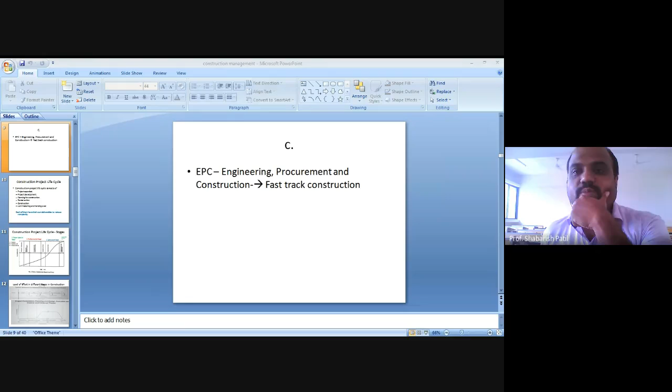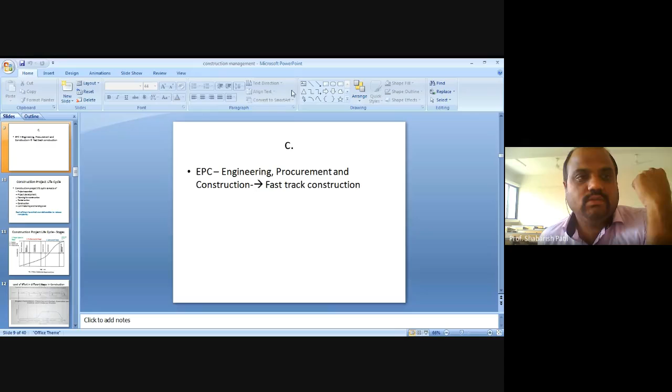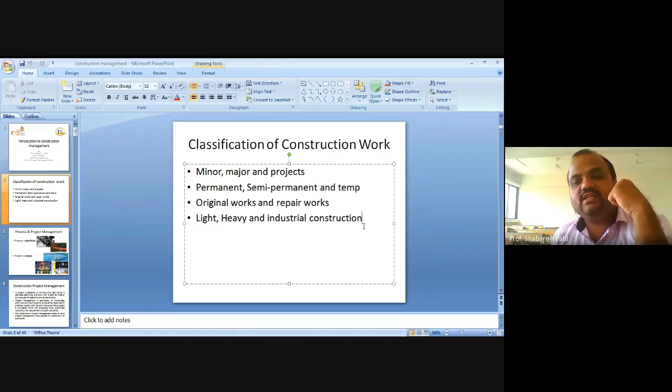So last class we were discussing, just recall those slides again. The classification of construction work based on the amount involved in it, based on the lifespan of that particular project, based on whether we are doing a new work or repair work, and based on where it is being applied: light, heavy, and industrial. As far as light is considered, residential buildings, commercial buildings, institutes are all light structures. Heavy structures are like your infrastructure projects, and then industrial construction is something related to industries. At the same time, we discussed what is process and project management.

The line between process and project is very blurry. I cannot distinguish what is process and what is project because there's an advancement in technology where most of the things are becoming process, but still we may have to call it a project. Just to make you understand, manufacturing cars or processed food is a process, whereas construction of a building, bridges, research and development, and the space or astronomical area are all called projects. A project is very unique, having a starting and end point, and it consumes resources out of which we get an outcome. That's called a project.

If we apply the knowledge of project management in construction, that becomes construction management. In most cases, we have to understand what project management is and how we have to apply it. Not just the knowledge and the skills, but the tools and techniques involved in project management. If we apply them to construction work, that becomes construction management. But still, just recall that management is always an art. Management is a science, it's an art, and it's a profession.

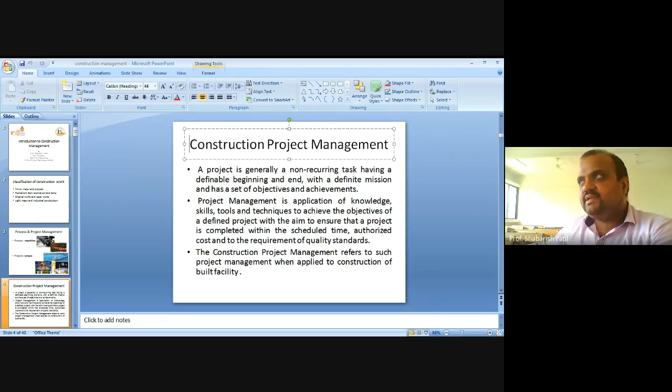Let me give you an example. You may be a good driver, you have good driving skills and all those things. If the one coming opposite to you makes a mistake, still we come across an accident. Management is the same way. How we are handling it, who is in front of us, whom we are handling, it all depends on that also. So there is always, I should not say this, a bit of luck, or some charismatic approach by a person where he can handle the situation. Those things also matter in management. But here we will be dealing with only direct managerial approaches.

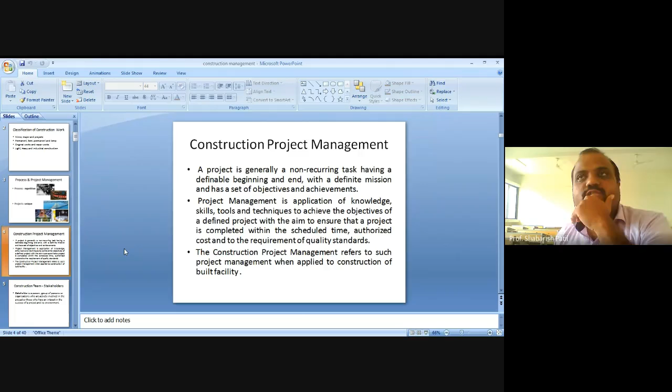Then we discussed who the stakeholders involved in construction are. There are many stakeholders like the owner, engineer, architect, contractor, subcontractor, the government, the financier, local authorities. It varies from project to project. The stakeholders for a residential building will be different from those for infrastructural projects. When it comes to public works like highways, dams, canals, stakeholders will be too many. You have to take accountability of each individual. Then we should look at the execution of the project. Before we start the project, we should take the consent of the stakeholders. That is one thing.

Basically most of the organizations, as far as construction is concerned, make a record called a stakeholders register. That's necessary. Once you visit any construction industry, you ask for a stakeholders register. I'm not asking you about local construction agencies. If you happen to visit L&T, Gammon India, ITD Cementation, Shapoorji Pallonji, such companies basically deal with infrastructure.

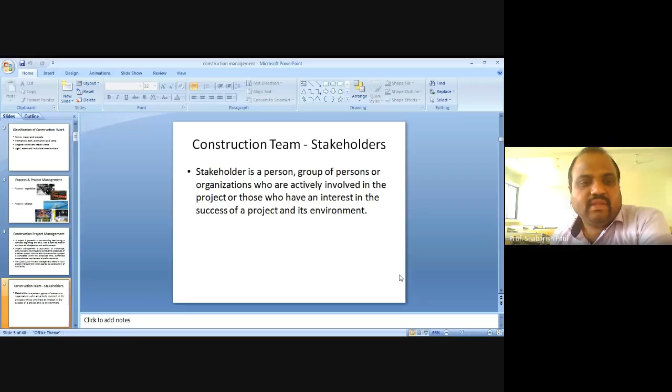They always keep a stakeholders register so that the concern of every individual is taken into account, and then the decision about the project execution is made. That's also a government responsibility. So this is a construction team or the stakeholders involved. Just a broad view: you have a contractor, an architect, engineers, subcontractors, consultants, owners, and then we have financiers, government agencies, and public agencies.

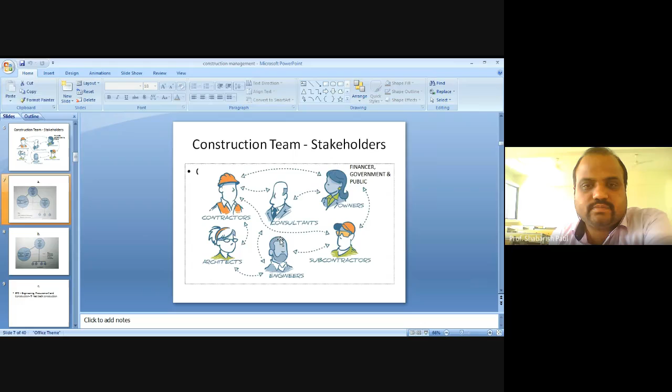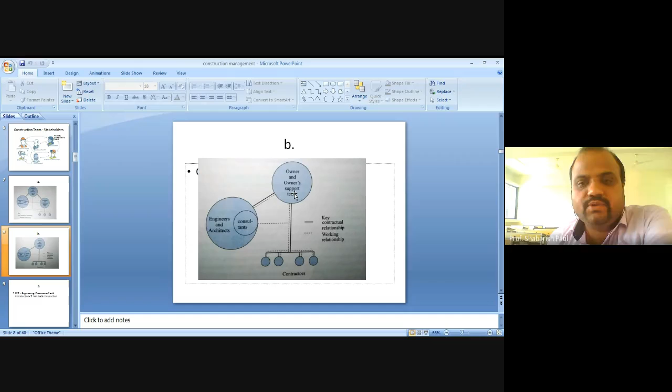The second one is this type of relation where the owner directly has a working relationship with the contractors and with the engineers. Here this generally becomes some sort of government project. The government will be the owner, and governments will have their own engineers and architects, and at the same time the government will allocate the work to the contractors. This is basically how most government works happen, like PWD, CPWD, etc. It's of this sort.

The third is what I call EPC, engineering, procurement, and construction, a type of relation where everything is allocated to one agency. Most of the good construction companies take projects under this model. Engineering, procurement, starting from scratch to the completion of the work, everything is done by this single company. He may go for subcontractors, but that is not an issue. In the working relationship only two parties are involved: the owner, and the one who deals with all engineering, procurement, and construction.

So there is good communication when we allocate the work in such a contractual relationship. There's always a good relationship with the owner because there are no other parties involved. When there are only two people, communication will be better, so no communication gaps. I think in that case this works as a better model. At the same time, within the company, there will again be better communication.

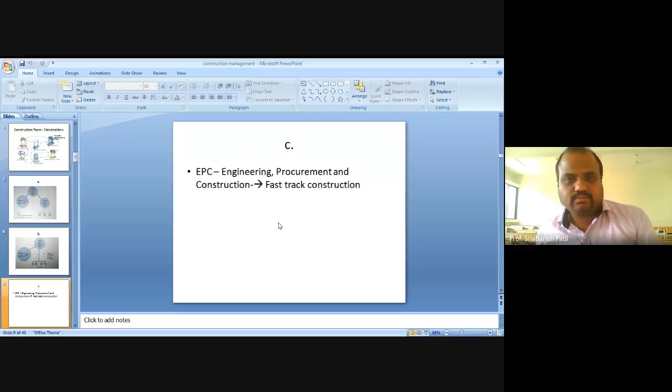Next, what does the construction project life cycle involve? We have to understand what works are involved, also called the stages of the construction project. The construction project life cycle consists of project appraisal, project development, planning for the construction, tender action, then the construction, then commissioning, and then handing over. This is one broad classification of a project life cycle.

Project appraisal is the initial stage. We should take an approval from the government to construct this project. That's how the PWD or the CPWD works. They seek permission from the government. Once they approve it, then comes project development.

Okay, in a project appraisal, it is only in imagination. It will generally be some sort of basic thing in a project appraisal, maybe some sort of imagination model or some sort of virtual model. When it comes to project development, they think of writing down or making reports for everything. They plan it. Basically, they may use tools like software to plan it.

Once that is also approved, then we go for the third one, that is planning for construction. Once the first two phases are over, the third one is planning for construction. We have to plan it for construction. How many engineers are required? What type of engineers are required? What machines do we require? What type of human resource is required?

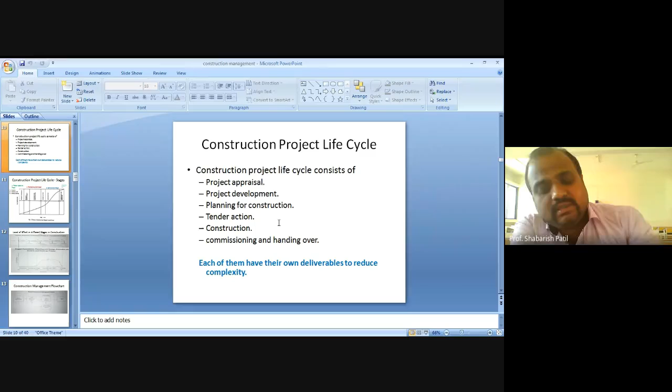Once the tendering process is over, a suitable party is selected. In most cases, selection of a party is based on the amount, the rate they quote. So the lowest bidder will be given the chance for execution, that is construction. Once construction is completed, they have to hand over the project to the owner, maybe the government. So commissioning is starting the project and handing over the project to the owner.

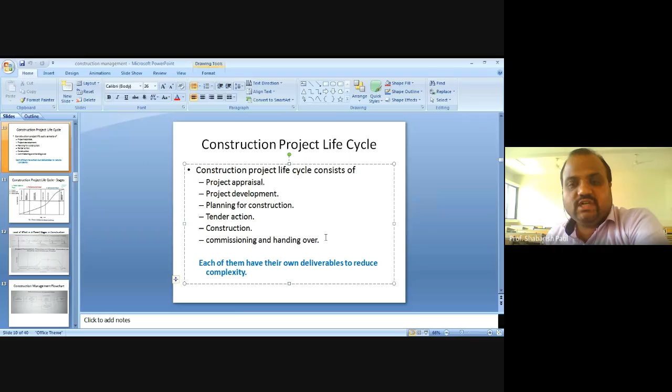One thing to understand here is each of them has its own deliverables to reduce the complexity. This life cycle, the six I have mentioned, is as per the IS code. If you refer to other textbooks, you may get different answers. This is a broad classification of a project life cycle. Each stage has its own individual complexity. If I want to reduce my complexity, I may have to increase the number of stages. The fewer the stages, the more the complexity. And again, it all comes with experience. How to judge, what to judge, it always comes with experience.

I have tried to show the same thing to you in the form of a graph here, a typical project life cycle. Along the x-axis is time, and along the y-axis I have shown the percentage of completion. These are the different stages of the construction project. The first one is the project appraisal stage. What is involved in project appraisal is inception, feasibility, and strategic planning. These are the main concerns during project appraisal.

And as far as infrastructure mega projects are considered, this is generally done by the government. In the inception, feasibility studies are taken. Feasibility is like whether the project is going to be profitable or not; one example, that is economical feasibility. There is another thing called environmental feasibility, sociological feasibility. There are many feasibility studies we may have to do.

Okay, so all such feasibilities are done. Then once everything is satisfied, they go for the strategic planning of that particular project. So this is the first stage, project appraisal. Once I complete this first stage, only around 1 to 2% of the work is completed here.

Then next comes the pre-construction stage. Anything done before the construction, that is the pre-construction stage. What is involved in the pre-construction stage is project development. We go with the project development process, we plan for the construction, then we go for the tender action.

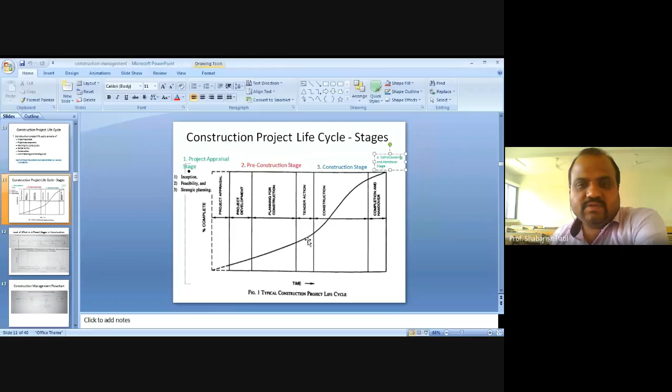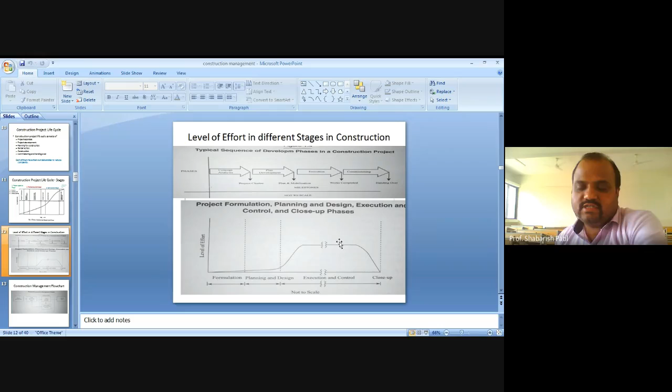When it comes to execution, look at this. As far as execution is considered, you require 100% effort. As the project is going to complete, your level of effort required again becomes less. When you come to close-up of the project, your level of effort will be zero. So this is how your effort as a construction manager is going to vary: in formulation it's very less, in planning and design a bit more, but it's huge in execution, and at the end of the project it's again reduced.

And construction management is required from the starting phase to the end phase. It's required everywhere. So if you want to be a construction manager, you should know everything. You should have a knowledge of design, quality, safety, and the design and drawings of the construction. You should understand how laborers are working, you should understand how site engineers are working. The role of the construction manager is very, very huge.

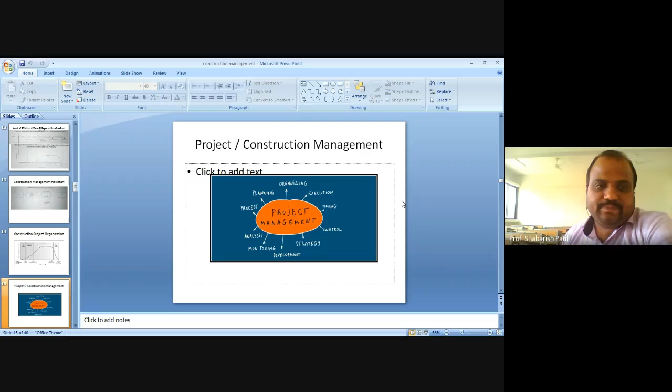Next, I want you people to make a list of activities which may exist in a construction project. I'll give you 2 minutes. Please make a list of activities which are involved in the construction phase, construction work. And meanwhile, please give your attendance in the chat box.

Imagine yourself in the shoes of a construction manager or a site engineer. Then think of what activities you may have to do being a construction manager.

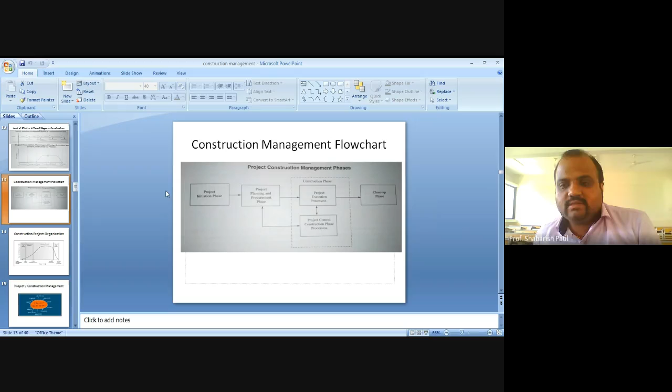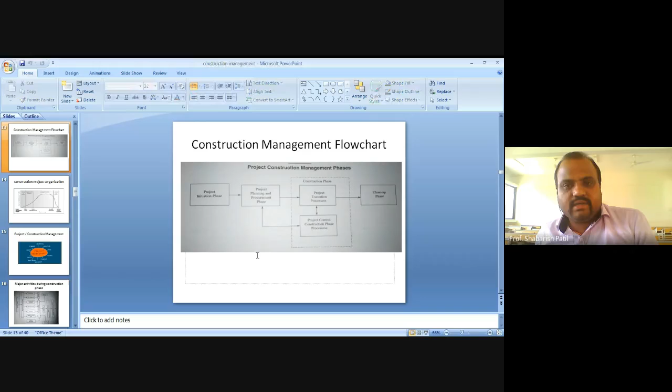Good. See, I require participation from your side also, otherwise it becomes very difficult for me to handle the class for 45 minutes. Just a single person barking on one side, that becomes very difficult.

Okay, the same major activities during the construction phase, I have made a list. See if you have missed something. Now look at this pictorial way of the activities done by the construction manager in the construction phase. He is involved in signing of the contract. The construction manager's role is there in tendering and giving the contracts. At the beginning of the construction phase, he has to mobilize the resources. He has to approve the staff.

The mobilization of the resources is bringing all the required construction materials. Say equipments are required, we have to bring those equipments. It's called procurement. Procure the required people of the required designation. If we require a construction manager, it should not so happen that I bring an electrical engineer to the field. So I should bring the resources through a proper channel with the proper specialization.

Then construction scheduling. We have to schedule our work, when to start, where to end. If you take an example of construction of your own building, the first work is the line out or the setting out work. Once I give a line out, then comes the foundation.

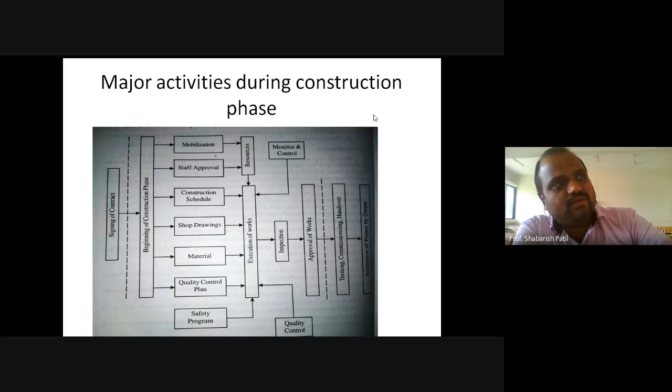Then materials. I have to handle the materials very carefully. I should give orders to the vendors, the vendors send the materials to my site, and I'm supposed to make sure that I'm getting the materials at the lowest cost. That's material management. Whatever I have written in the boxes here, you can name them as mobilization management, staff approval management, which is basically human resource management, construction scheduling management, done by the planning engineer. All these can be ended with the name management. They have their own different identity on the field and do their own work. Material management, quality control plan.

A quality engineer is always required to have quality control and to assure quality assurance and quality control. Then safety, it's called safety management. With all these things, we execute the work using resources. And we have to monitor and control our work, the execution of the work, because we need to make sure that our work is going as per the plan. Inspect it as and when required.

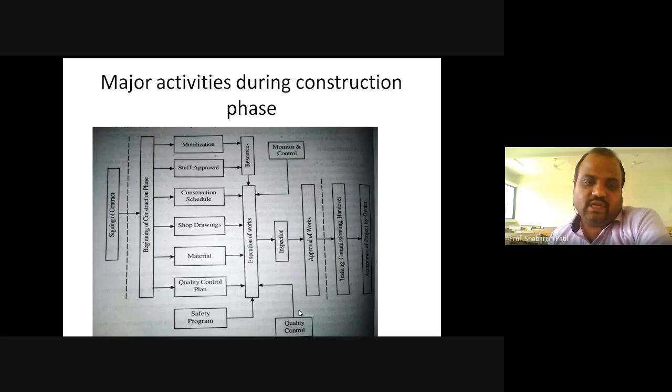If this is being done, then the government is going to check your work, and he is going to approve your work. After this, again, we may have to go for testing, commissioning, and handing over of the project, and then it's an acceptance by the project or by the owner. So these are the activities broadly involved by a construction manager on the construction site. I hope you got a rough idea about what a construction manager may have to do on the field.

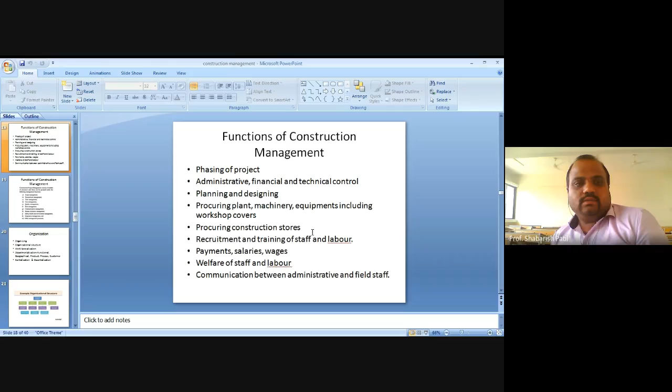Next, what makes these construction projects very unique? See, construction projects are very unique. Unlike a textile industry or any manufacturing industry of PPE kits, which are very different, they are very process-based. But the construction industry is very unique. Why? Because it's a one-time activity. Owner, engineer, and contractor are going to be different for each one-time activity. The complexity involved is very high here.

It's a multidisciplinary complexity. If you take an example of oil refinery work, you cannot make a list of engineers involved there. We require a civil engineer, mechanical engineer, automotive engineer, robotic engineer, chemical engineer, biotech engineer. We require so many engineers in the refineries. Construction of refineries is again done by a civil engineer. It's one of the construction projects. Electrical engineers we require. In projects we require very different types of engineers, different types of labor. So it's too complex. It makes it multidisciplinary.

Another thing is high cost and time for execution. Money has a time value, and the cost involved is also very high. I think I showed you in the last class that almost around 9% of GDP is being covered through construction. So the amount involved is huge here. Difficulty in achieving quality standards: it becomes very difficult to achieve the quality standards in some cases. Risk of failure is very high. Uniqueness of the people involved, so handling them is again very difficult. Feedback mechanism is not so easy.

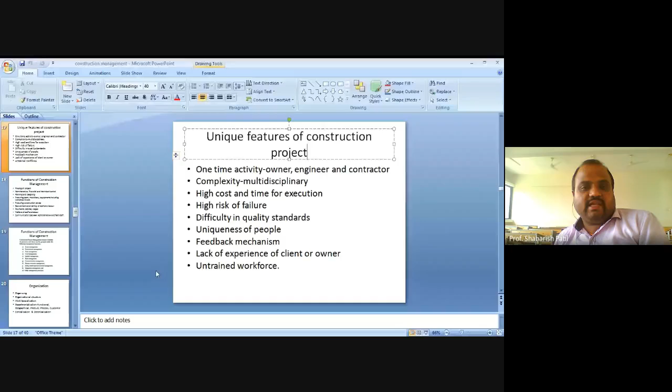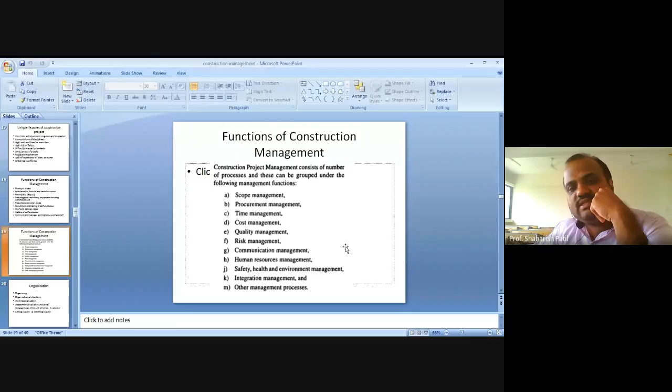In the next class, we'll deal with this. I think I will end with this slide. Please go through this slide. I'll start with organization in the next class. These are the functions of construction management: scope management, procurement management, time management, cost management, quality management, risk management, communication management, human resource management, safety, health and environment management, integration management, and other management processes. There are many other management processes which may be involved in construction.